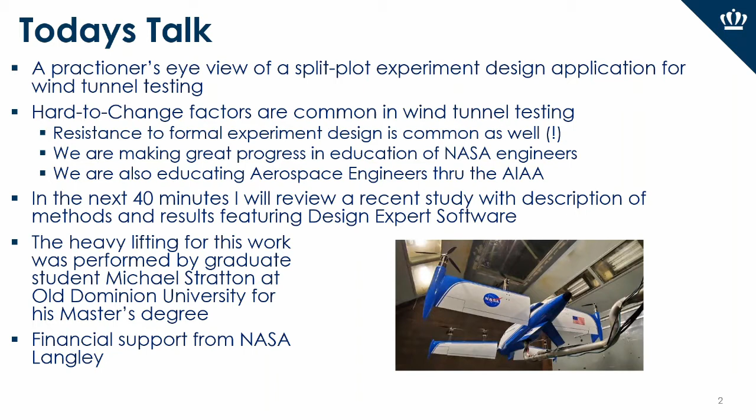In the next 40 minutes, I'm going to review a recent study. I'm going to go through a description of methods and try and feature how we go about this experiment design in design expert software. I want to acknowledge my student, Michael Stratton, who has just taken a job at Patuxent River in flight test. He's the one that did most of the heavy lifting in this in terms of running all the experimental runs. I should also mention some financial support from NASA Langley.

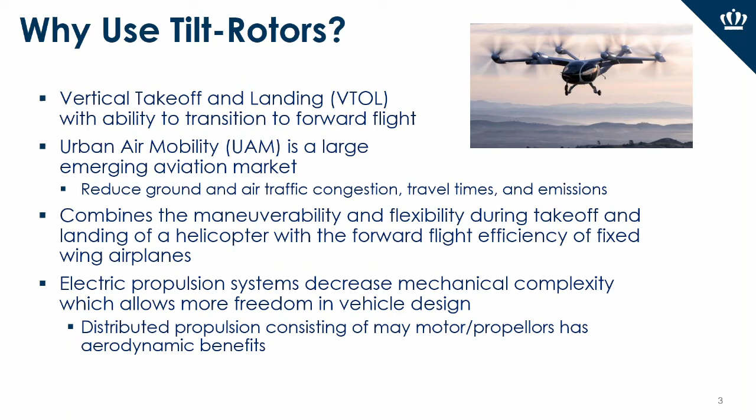So why use tilt rotors, or what are tilt rotors? The picture at the top right shows one version of a tilt rotor craft. Vertical takeoff and landing is what VTOL stands for, and the E just means electric powered. Urban air mobility is now a large emerging aviation market. The idea behind urban air mobility is to reduce ground and air traffic congestion, travel times, and emissions. These craft are going to combine the maneuverability and flexibility during takeoff and landing of a helicopter with the forward flight efficiency of fixed wing airplanes. The electric propulsion systems really decrease the mechanical complexity, which allows more freedom in vehicle designs. So we see all sorts of variants coming out nowadays. The idea of distributed propulsion, meaning using smaller rotors with many motors around the aircraft, gives us a lot of different aerodynamic benefits, and it's very flexible in how we approach our design.

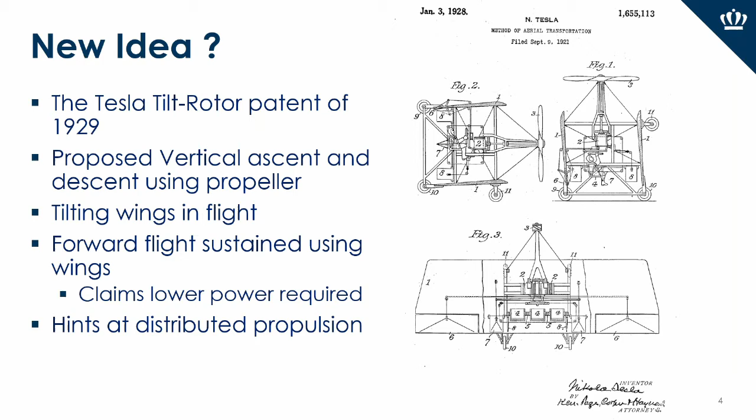Is it a new idea? Probably not. Here's Nikola Tesla's patent from 1929. He proposed vertical ascent and descent using the same propeller used for forward flight. So it's not a new concept, but it's one that has really come into vogue now that we have efficient electric power and more advanced batteries.

They're all control surfaces, so we have a lot of factors here, and we're talking about an aircraft that hasn't seen a lot of historical use. We don't have a lot of data on this at all, in fact very little. One of the aircraft Greg showed in the last talk, the CV-22, is an outlier in that statement because it's been flying for a long time, but there are very few other examples. So a lot to be learned still about these aircraft.

Wind tunnel testing methods provide a rapid means of characterizing the aerodynamic performance, particularly when you have a very complicated geometry like this one.

At NASA Langley, they've been building their test programs on statistical engineering, using design of experiments and response surface methods. One thing learned from aircraft like this is there are many complex interactions, and the models describing their performance are higher order, so they don't lend themselves well to classical second order designs.

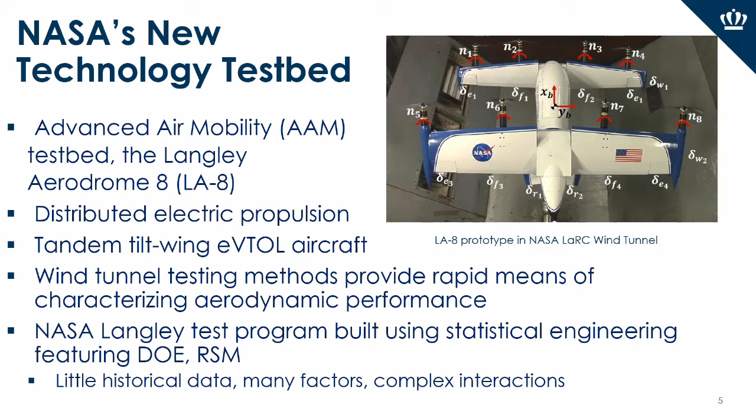You have to think a little more like what Greg is showing, and we have to have more points. We have to have design spaces that are constrained in odd ways. And yet we still have to look back and ask how much correlation there is in our parameters, and worry about prediction variance and all the metrics we look at in experiment design.

So what's the project motivation? Well, eVTOL technology is fairly new. The propeller aerodynamics associated with them, in this case, require a propeller incidence, meaning it's tilted up against the airflow. There's been work done in that, but it's not really well understood. The newer blades we're using now, and the smaller sizes, bring additional complications.

The overall flight modes the aircraft sees include hovering, flying like a helicopter low to the ground, transitioning to forward flight, obtaining forward flight, and then reversing the whole process to land. Analytical modeling is providing relatively poor predictions, and it's difficult to build this up from first principles.

Computational methods can be used, but they're complex, and with a complex aircraft they get even more complex. They're arguably not as accurate. I'm sure the CFD people are throwing darts at me for saying that, but overall it's a lot of extra work to do it computationally. So wind tunnel experiments are needed to gather specific propeller performance data for simulation.

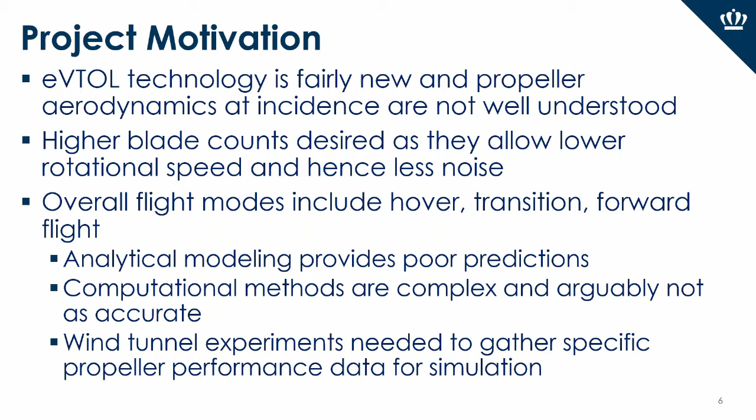Our project objectives are performance evaluation for the propellers used on the LA-8 UAM design I showed. Currently it uses a 3-bladed propeller, but they wanted to look at 3, 4, 5, and 6-blade configurations. They want to look at the full performance envelope for range of RPM, or motor rotational speed, and angle of incidence, using robust, statistically defensible math models for this propeller performance.

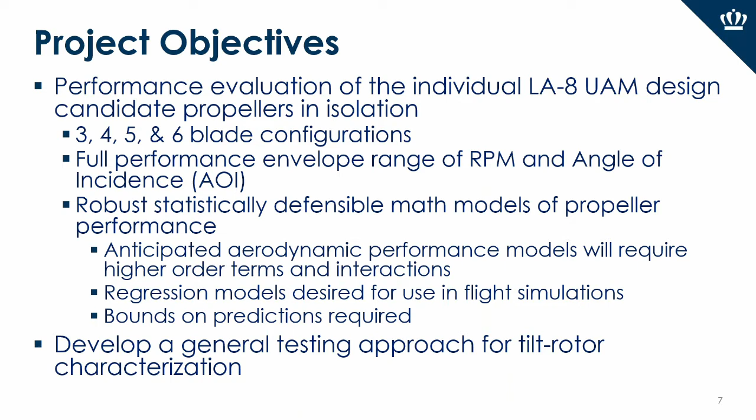The anticipated aerodynamic performance models we know are going to require higher order terms and interactions. Regression models were desired for use in flight simulators, and they wanted to have some bounds on prediction. So we want to develop a general testing approach for tilt-rotor characterization.

It will be able to hover, take off, clear any obstacles like buildings in the city, and then transition, meaning tilt the wings forward, until it gets to forward flight. Basically 0 ground velocity up to, say, 150 miles an hour in forward flight, and then reverse that and land hovering once again.

When you set this angle of incidence, you're setting the angle of the propeller with respect to the flow. Hover is going to be somewhere around 82 to 85 degrees. Transitioning occurs at a much lower angle of attack, probably down in the 45 to 20 range. And finally, forward flight is about 0 degrees.

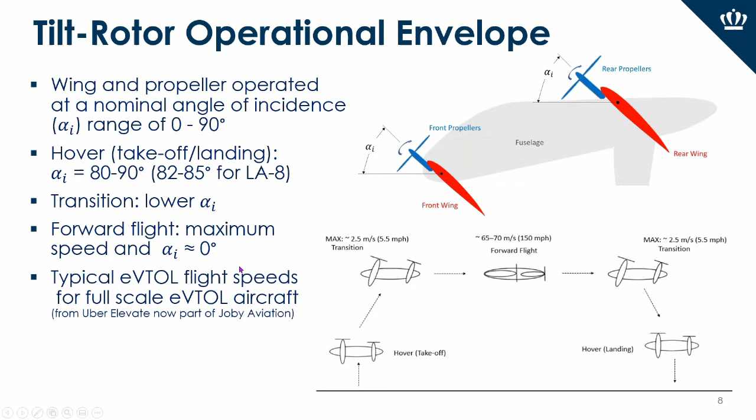So what are the metrics we look at for performance measurement? Well, we choose non-dimensional coefficients for measuring our forces and moments.

So 3 forces and 3 moments are measured. Think about 3 dimensions - you have a force in the X, the Y, and the Z direction. You're also going to have a moment, or a torque, about each one of those axes as well. So, 3 forces and 3 moments.

Now the propeller is going to be at an angle of incidence, shown here as alpha I, to the oncoming free stream velocity.

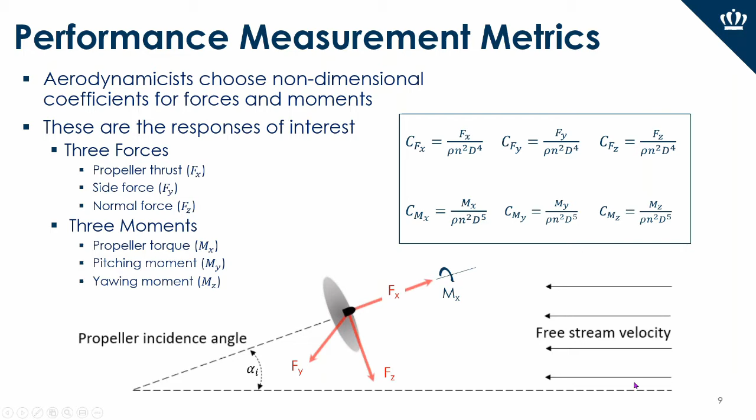This experiment was performed at the Old Dominion University low-speed wind tunnel. This is not the one that was talked about in my bio, but a small facility on campus at ODU where we do these types of experiments.

To talk a little about how a wind tunnel works, think of it as a closed duct - a racetrack of air moving around in a closed circuit driven by a fan. It changes in cross-sectional area primarily to save energy in the return of the air to the fan, and also to allow the flow to slow and be conditioned by breaking it into little eddies and reducing turbulence.

Then going through some area contractions, we have 2 test sections - a larger low speed one here, and then a high speed one. These were really well poised for the experiment because the hover to low speed transition could be done here, and beyond to high speed forward flight, we could get up to the speeds we needed. So it was actually very well poised for the project.

You can see the 2 pictures I showed at the beginning of the talk, and those are the test stands that go in the various test sections. Data is collected in both sections.

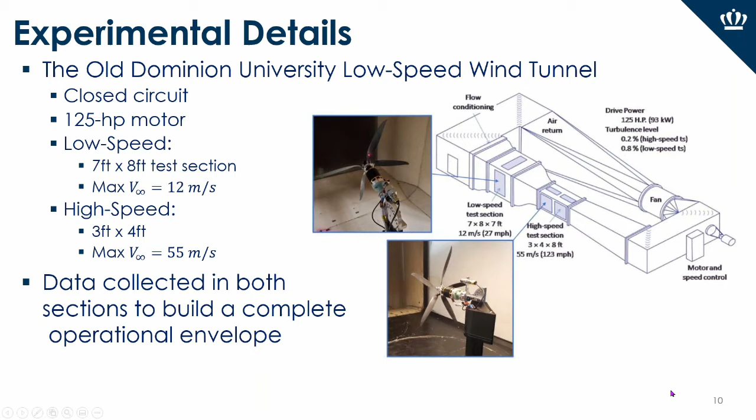That's possible using a rig that looks like this and is movable on different supports. The support is designed to be robust to vibrations - with that rotor spinning, any kind of minor imbalance gives you some vibration, so it has to be robust to that.

We did originally have a servo that drove the motor around at various angles of incidence, but we had some trouble with that and decided to go back to a simple sector that allowed us to set the angle of attack by locking a pin in place.

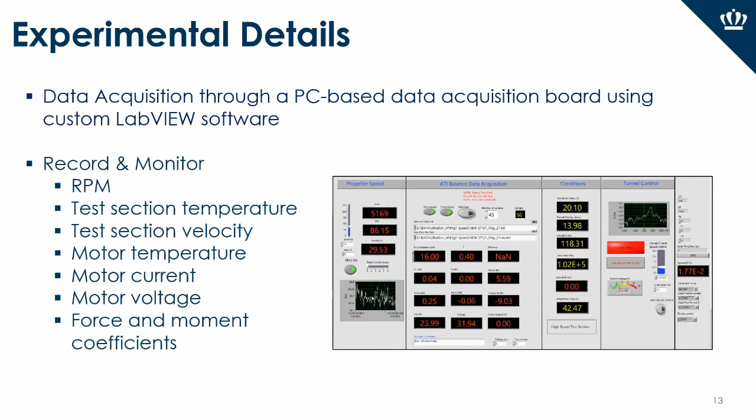For the low speed design, the lowest velocity up to about 12 meters per second, we looked at using that low speed test section. The test objective here was, first of all, to find out what the design space looks like. Unlike some of the experiments shown before me here, those are very expensive experiments. This one is not all that expensive. It's fairly easy to make runs, and the accounting is such that we get to pretty much do what we like in terms of exploratory runs.

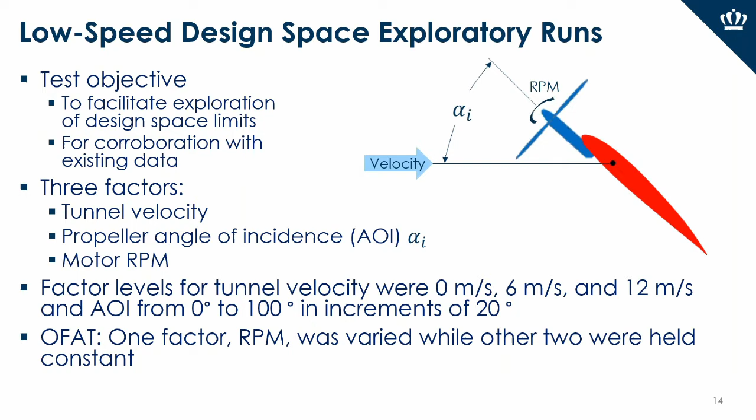I can't stress that enough. If you do an experiment design, get as much information as you can at the start of an experiment to set you up for success.

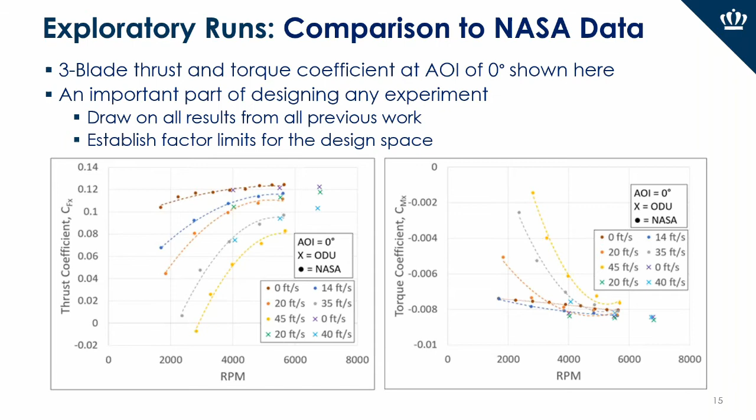Primary objective here is the accurate prediction of force and moments. And the question that was asked earlier about, when you're looking at a prediction model, is it essentially okay to have variance inflation factors that maybe aren't ideal? I'm going to address that later. Where that really comes into play is when you start using higher order models, because it's really hard to get your VIFs down to the rule of thumb value of under 10. That's difficult to do. And I'll say from the start, our objective here was prediction.

So we were really focusing on our prediction error. Because we couldn't use classical designs, since from our original exploratory runs we found out right away that we were at least looking at 4th order modeling, that really lends itself to an optimal approach. When we're talking about prediction, the natural selection is the I-optimal approach. While we built the design, we decided to look at another order above the order we felt we were going to use, a little bit of headroom, so we decided to build for a 5th order model. Any terms that are not used go into our lack of fit error budget. That worked out very well in this case.

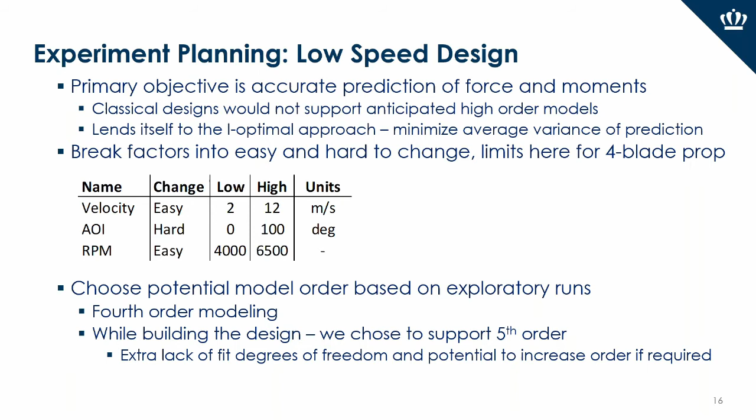So what we ended up doing was taking velocity from 2 to 12 for the low speed design, angle of incidence from 0 to 100, and RPM from 4,000 to 6,500. That's what we learned from our initial exploratory runs. Now we have our factors, we have our levels and limits, we've identified our model order.

One of the lessons we learned from the 4-blade split plot, the first one we did, was that recirculation effects at high incidence angles and 0 tunnel velocity were actually giving us a lot of trouble. So we had to have some velocity, couldn't start at 0 inside our closed tunnel, so we had to start at 2, and that's what drove that choice. We also had some constraints on what our power supply could put out when it came to the 5- and 6-blade props, because we had a given wattage for our power supply.

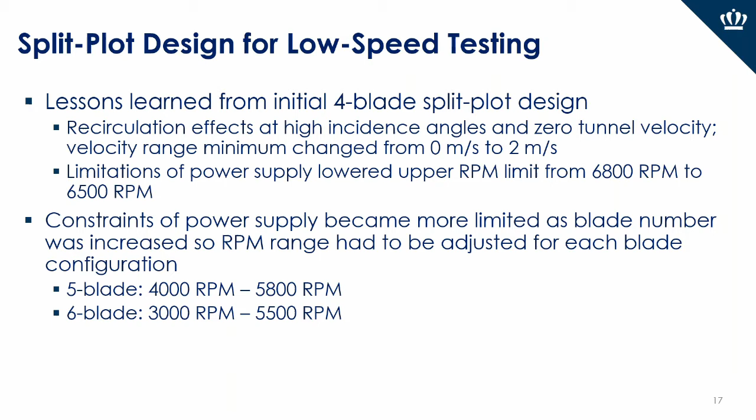We thought we were going to be able to run it at its full voltage, and then we found out that the motors given to us could not run at full voltage, so we didn't have quite the overhead we needed. Why mention this? This always happens - you set out to do something and somebody throws a curveball at you, and you have to adapt. A lot of people pushing the one-factor-at-a-time approach always ask, how are you going to adapt? So we're always trying to show that we can adapt. That's one of the goals here.

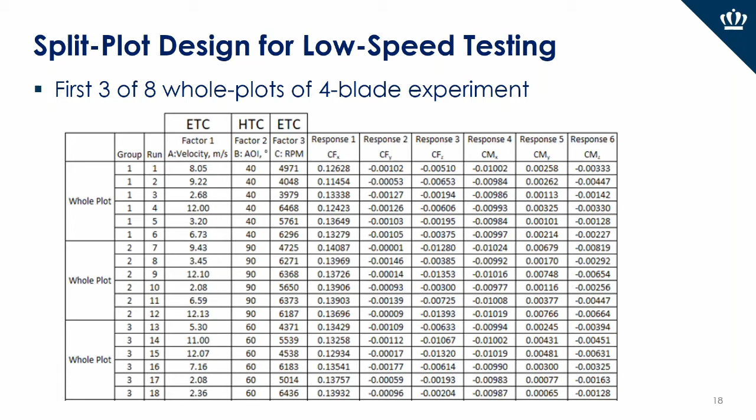Here's what that split plot design looked like for the low speed test. I'm showing 3 of the 8 whole plots. The whole plots show easy-to-change and hard-to-change factors. Velocity and RPM are very easy to change from the control panel. Angle of incidence required us to pull a pin out and in, go inside the wind tunnel with the flow off, and change the angle of incidence. We didn't want to do that for every run, hence the split plot design.

How do you do this in Design Expert? How did we do it, I should say? We started by choosing optimal design under response surface, under the split plot heading in the navigation panel - you can see that on the left. Specify your factors, whether they're easy or hard to change, and your levels.

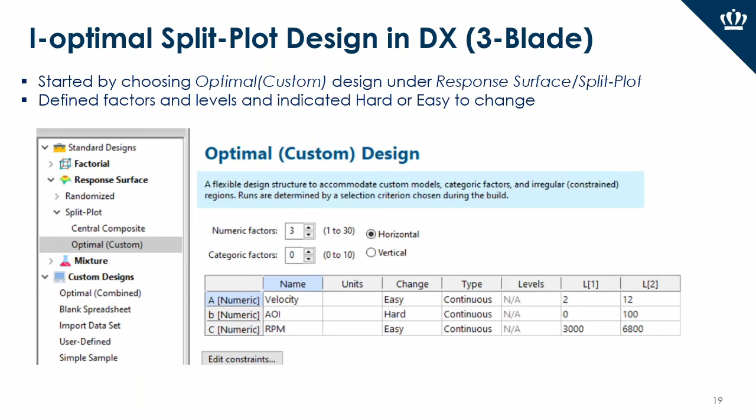Next, you define the model order. We could support up to a 5th order model - that's what we wanted to have. We knew we'd probably go back to a 4th order. On the right-hand side, I'm showing the flavor of the terms involved in the model - that's just up to 3rd order terms, but those are the kind of terms we wanted. We wanted these mixed terms with mixed interactions. That was important to us because we could see in our exploratory runs that we'd be looking at those types of terms.

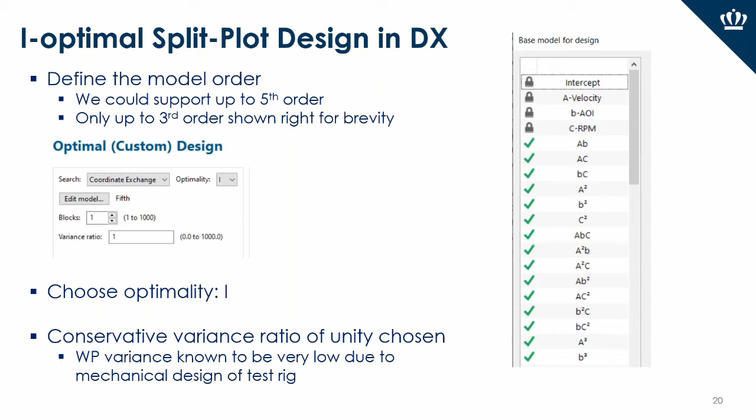We chose I-optimality, with the goal being to minimize the variance of prediction over our design space. We also knew the whole plot error associated with our testing was going to be relatively low because we were able to set the whole plot factor very exactly, and we knew it was very repeatable. So we knew that would be fairly easy to deal with. We left the variance ratio at a conservative value of 1 - it was actually about a half when we measured it at the end, so that turned out to be a good planning value to give us a little headroom.

We added additional whole plots to the recommended number of whole plots - I believe Greg alluded to this in one of his slides too. It's really important whenever possible to have as many whole plot reps as you can, so we added the ones we felt we could afford. We had 5 additional model points for increased lack of fit degrees of freedom, and we were able to run the coordinate exchange algorithm for point selection to look at any points in the design space. So this is what those menus look like if you're using Design Expert.

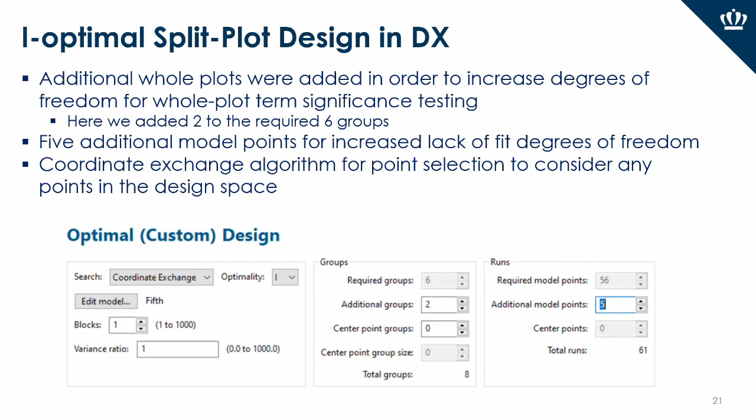After the design was built, we adjusted the angle of incidence values that could not be achieved to the nearest value. In hindsight, we should have used a factor type of discrete and specified the discrete values, but there were reasons we didn't. One was we thought we'd be able to vary it continuously at first because of the servo, but that didn't work out. So anyway, there are a lot of reasons, but it worked out fine. We just had to adjust our set point a little, go back and look at our design metrics, and work with it the way it was, and that worked out fine.

Okay, so next thing we do is use evaluation to review design metrics.

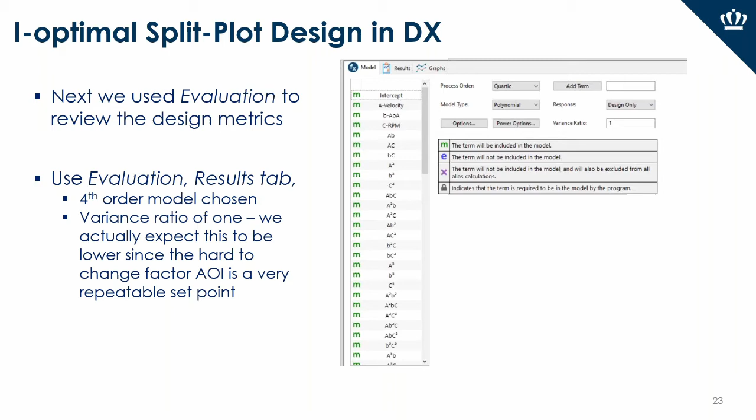Again, under the evaluation results tab with a fourth order model chosen, our intended model, and the variance ratio of 1, we can review some of the metrics that we like to talk about. We could talk about power.

I noticed Greg was emphasizing power, and it's very important. It's particularly important in design of experiments type designs like factorials, or when you're doing screening and you're very interested in understanding which factor does what. We're in a little different boat here.

First of all, we have very complex models, which makes getting very small VIFs difficult. And second of all, we're mainly interested in our prediction qualities. So we are willing to live with a little bit of variance inflation.

And really, it's kind of a necessity when you look at models, like even just looking at the whole plot terms. If you look at B versus B cubed, it's very hard to get all that correlation out just because of the way you set your factors. So we live with that.

And for this design, we had 3 whole plot error degrees of freedom and 23 subplot error degrees of freedom. Could have probably used a few more whole plot error degrees of freedom looking back at this, although the models work very well after the analysis.

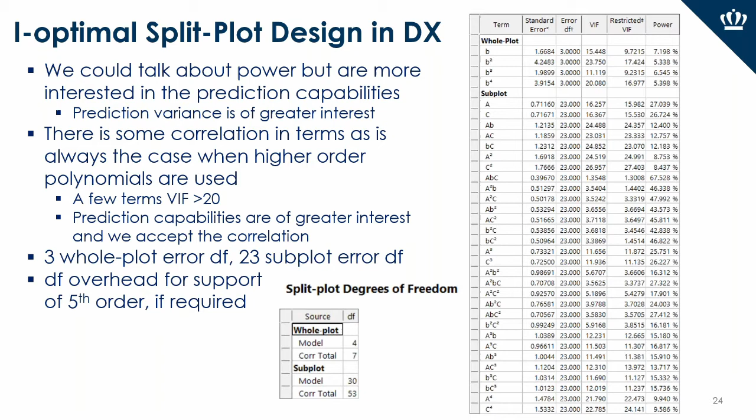Okay, well, this is my favorite metric when I'm comparing designs, the fraction of design space graph. If the goal is characterization, the emphasis is on producing a fitted surface as precisely as possible.

And for the 2 main areas I work in, which includes calibration, where we're looking at instrument calibration, we're trying to reduce our confidence intervals as much as we can for prediction. And then also in aerodynamic characterization, where we're really doing the same thing. We're building a model, we are trying to understand interactions.

We are typically not looking for factors like you would in a screening design, where you'd say, well, let's throw in landing gear off or on. It probably doesn't have effect. We know it has an effect. So we know all the factors that are involved in our design are going to be part of our characterization. It's just a matter of understanding how they're part of it.

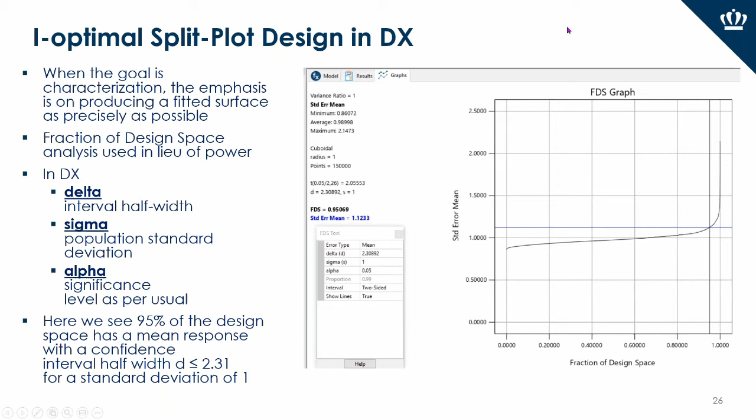We're often using 95%. And for this particular example, we're looking at 95% of the design space having a mean response with a confidence interval half width less than or equal to 2.31. And since we're using a standard deviation of 1 here, you can think of that as 2.3 standard deviations from the mean. All right, so that's our interpretation of this FDS graph.

So it's a little different than what somebody might be working on in, say, chemical processing or manufacturing or other disciplines, right? Or if you even dare to go back to somebody like Fisher, I can't imagine he's getting these kind of R squareds for crop testing.

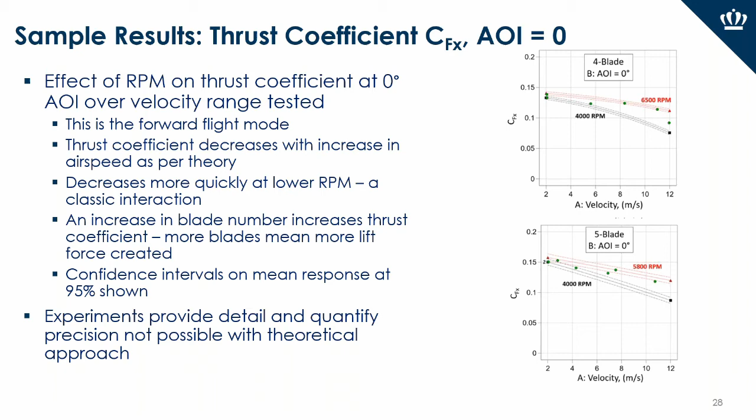So now let's take, instead of a forward flight condition like we saw there where the angle of incidence was 0, let's now go to 60 degrees. So now the prop is 60 degrees inclined to the flow direction. It's an interesting point, funny things happen there.

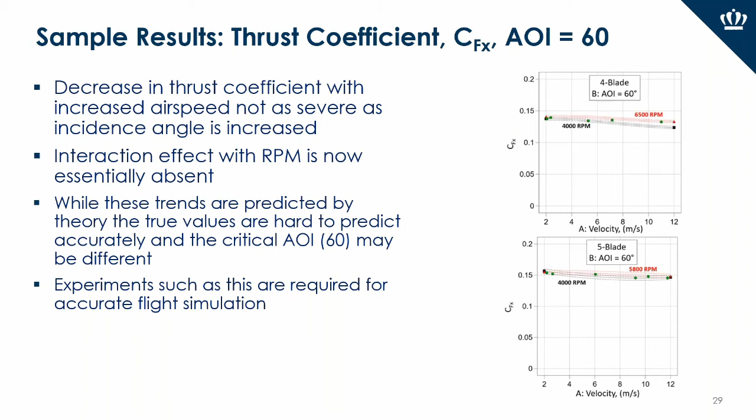Now we see that, remember that two-factor interaction we saw here, it's really kind of disappeared. Now there's very little difference between 4,000 and 6,500 in terms of thrust coefficient, right? And we see that for the 4-blade as well as the 5-blade. The interaction effect is gone. And finding that point is really important for flight simulation. So these trends are predicted by theory, but it's hard to grab that critical point without an experiment.

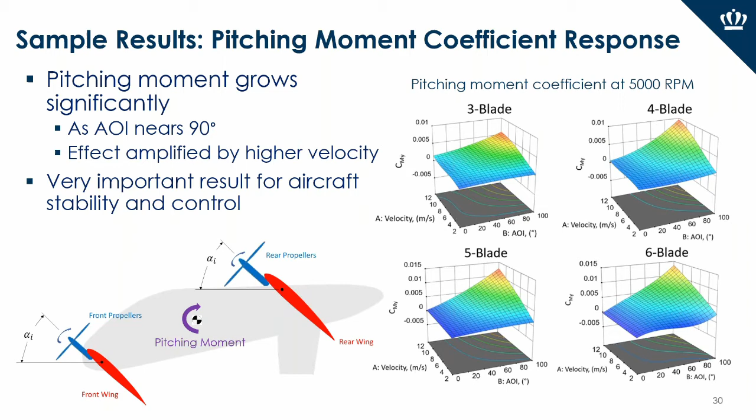To understand things like how to come up with a simulator for our vehicle, and to do things like predict how well, what sort of range we have, how easy it is to control, how big a control surface should be. All these things factor in from this test.

All right, so that was the low speed test. I'll now just go a little further and talk about the high speed test. A little less detail, but what we did with the high speed test is limited the angle of incidence from 0 to 20 degrees, because if you're at high speed, you're no longer at this high incidence angle. You're either about to go into the forward flight condition or you are in the forward flight condition, one of the two. So you're in between that 0 to 20 degrees.

A windmill condition occurs when you get to a velocity where you can no longer make thrust. It's called windmill because if you keep increasing the velocity, you actually get negative thrust, so you're drawing energy out of the flow like a windmill would.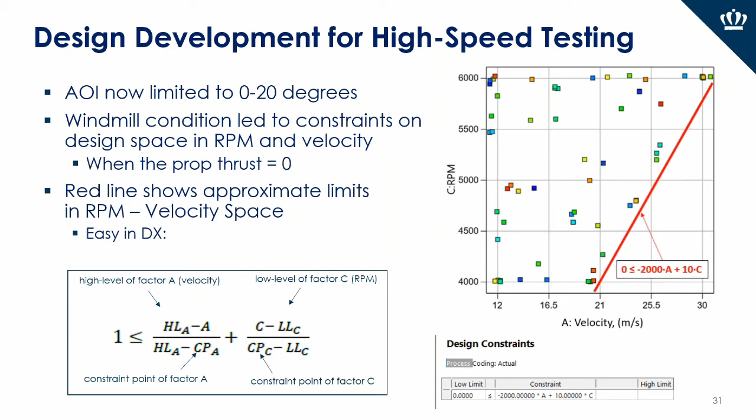Very nice, because using the I-optimal routine, we're able to get the best prediction variance distribution over this odd-shaped space, which is our goal. So if you're interested in how to lay out the constraint, it's shown here, and it's pretty well documented in the Design Expert help files.

So we're using that same I-optimal design approach, but we're now going to do an aggregate test that's going to involve all 4 of the propellers at the same time. Now we could actually support that because the angle of incidence was not from 0 to 100, but rather 0 to 20, and it made it fairly easy to do that in our high-speed test section.

Blade numbers now added, it's a categorical factor. So you can see here's our list of factors: velocity, angle of incidence, and RPM as before, but now with blade count over 4 levels, and it's a categorical factor. It's hard to change because you need to stop the tunnel, unbolt the propeller, and put a new propeller on every time that's changed, so we left that as a hard to change. Angle of incidence is still set manually, so it's hard to change. And then velocity and RPM are both easy to change. Okay, so that's a starting point.

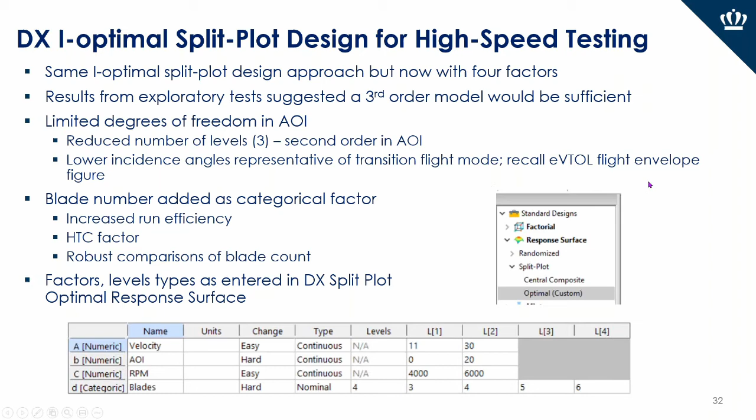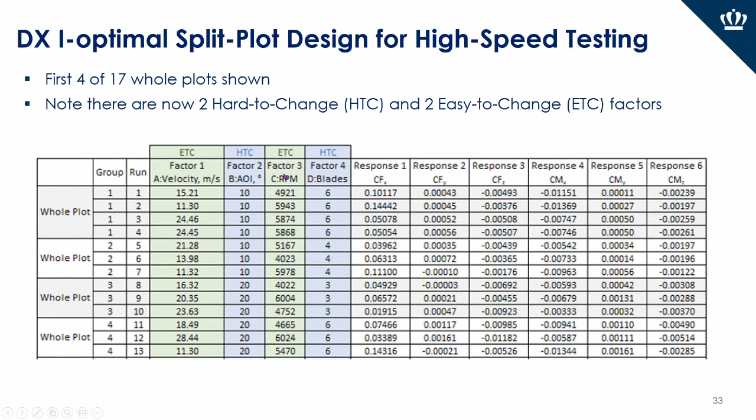And here's 4 of the 17 whole plots from the test. So you can see our 2 easy to change columns and our 2 hard to change. And reviewing the design metrics again in evaluation, now we have 5 whole plot error degrees of freedom, a little better than our first design, and 8 subplot error degrees of freedom.

That's fewer degrees of freedom than the previous design, but as we saw in the previous design, we had many more than we needed. And we found that model order went down, it didn't go up, so we didn't need that extra overhead. There are some issues with correlation, but it's fairly small by our standards. You can see over here, we have some terms that are high.

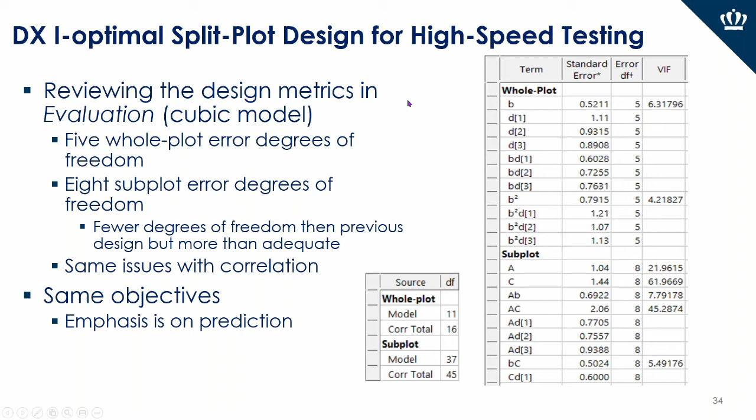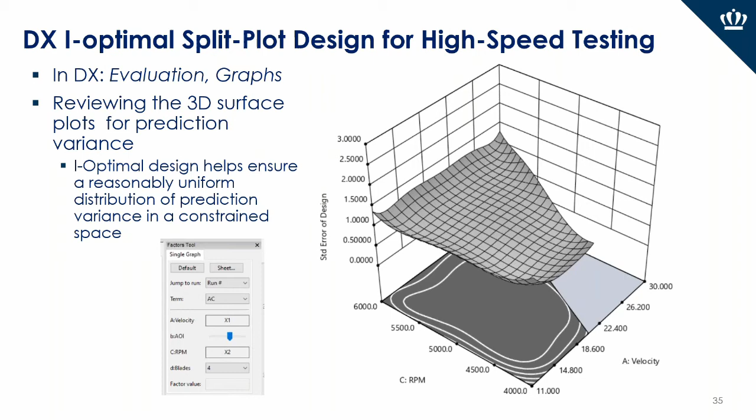And we had the same objectives, the emphasis was going to be on prediction. So again, using evaluation, looking at the graph section, here is what the distribution of prediction variance looks like for the constrained space. And again, the I-optimal routine did a really nice job of keeping that prediction variance fairly uniform across the space.

Analysis was done in the same fashion, using analysis of variance with REML. We got estimates again of the variance components, which I've shown at the bottom here. And once again, we can see whole plot error was relatively small compared to subplot error. And here's what the models look like, not quite as complicated as before, and they were limited to cubics.

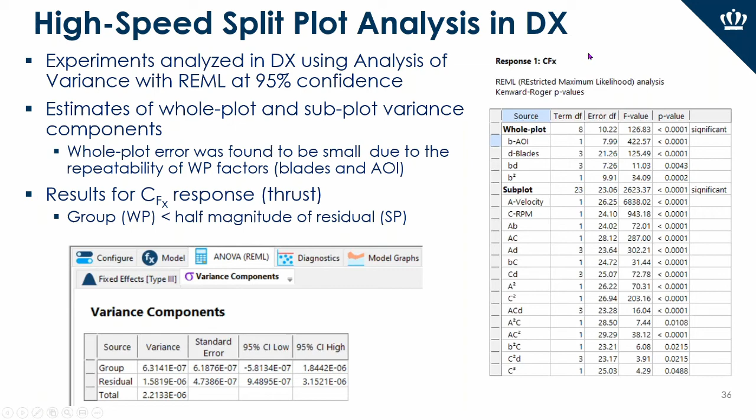Okay, some more results. We see now we can compare the props directly, and that was extremely useful. So each one of these colored curves represents a propeller's performance. Again, we're looking at thrust performance here. This is at 6,000 RPM.

Again, the family of propeller blades are shown here, and you'll note on the bottom two graphs, we're looking at the torque required to spin the propeller. So you can see as the thrust goes down on the upper curves, the torque requirements are going to go down as well.

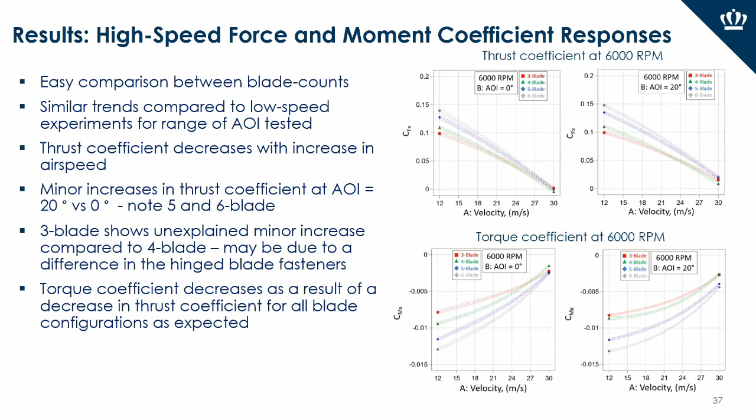They're negative values, that just has to do with the sign, but the actual magnitude goes down as we go up in speed. Notice that the green line crosses the red line—that's the 4-blade and 3-blade. So we found some anomalies, and the 3-blade showed this minor increase, and we weren't sure exactly what that meant.

We believe the 3-blade hinge setup was too tight, not allowing enough motion. So again, really nice details in experimental results, and you can pick them off because the plotting routines are nice, and Design Expert allows you to find these little anomalies.

In conclusion, the SplitPlot design approach gave us practical experiment efficiency. We still got to use our necessary randomization. We still were able to use our I-optimal routines to minimize our variance. The hard-to-change factor changes, as I mentioned, were very repeatable, and hence the whole plot variance was low.

We knew that going in, and it proved itself in the results. I only showed a very small portion of the results, hopefully some that you could relate to a little bit. The complete simulation database was created from these 5 tests, which included the individual prop tests at low speed and then one aggregate high-speed test for all of them. This database is going to be used for a full flight vehicle simulation.

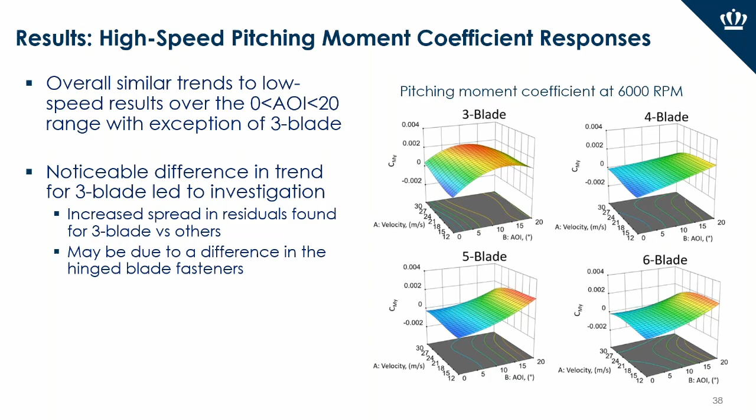And it doesn't happen over the whole range, it happens at certain points. That's what I showed in that slide that had the anomaly with the 3-blade.

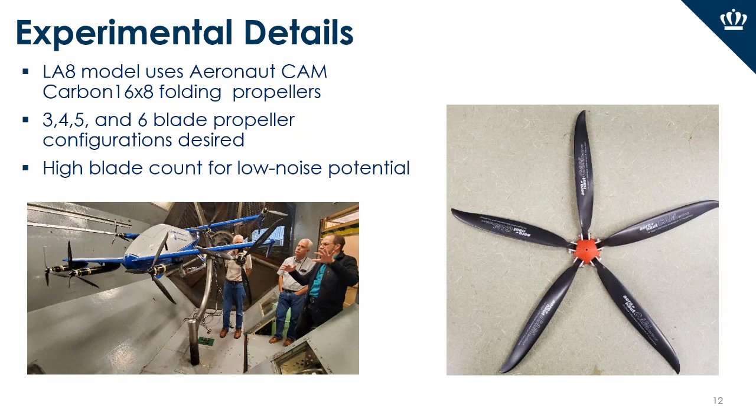Okay, here's a question about the SplitPlot structure and setting that up. Femi would like to know, how do you determine your hard to change versus your easy to change factors? What informs that choice? Oh yeah, it is literally the way it's described, what is hard to change and what is easy to change. I'll illustrate that with this piece of hardware.

So here is the motor with the propeller on the front. This is the actual propulsor, and then that's forward of where we're doing the measurement of the forces and moments. So the motor is controlled by a little knob we can twiddle to bring the RPM to any desired setting. That's easy to change. So that's RPM. The velocity of the wind tunnel is the same thing, you can twist a knob and the velocity changes very quickly, also easy to change.

The angle of incidence, which means raising the propeller up against the airstream at an angle, occurs by pulling a pin out here, physically moving this forward, and then putting the pin in at the new angular increment. So that's hard to change because we have to stop the wind tunnel, crawl inside it, pull the pin, set the new angle, replace the pin, and start testing again. So we try not to do that, we use that as a hard to change factor.

Yeah, I agree that it's pretty descriptive in what defines hard to change versus easy to change. Michael Morrow's comment says your models had many hard to change by easy to change interactions, they have a lot of degrees of freedom. Is this common? And if so, does this make you feel better about having low degrees of freedom for the whole plots, especially since your variance ratio is low?

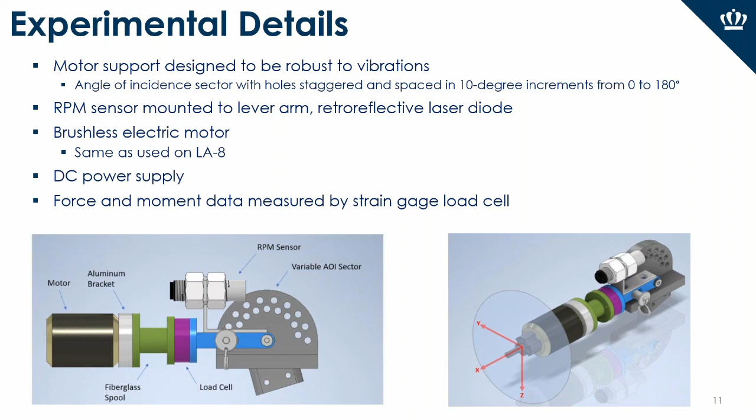Wow, okay, yeah, that's a good question. I'm not really sure if I understand what the question is. Well, let's start with the first part. So you had a lot of interactions between hard to change and easy to change, that has a lot of degrees of freedom. Is that common in your experience?

It is common, absolutely common, yes. Okay, so does that help to make up for having the low degrees of freedom for the whole plots? I mean, I can throw in, it helps because it drags those factors along in the modeling if you keep hierarchy. That's all I could think of. I don't know, I should probably know more about whether it changes anything else. It's a good question, I couldn't say more than that, really.

Yeah, I find that in our examples too, is that you can kind of get by with the low ability to test those whole plot factors, as when you can expect that there's going to be interactions with them, because the interactions will just pull along the whole plot main effects into the hierarchy. Yeah, I see what you're saying, because the subplot error is tested against the interactions between whole plot and subplot factors. I guess that's what the question's getting at. Sorry for being slow. Yeah, okay, that would make you feel better. You're right.